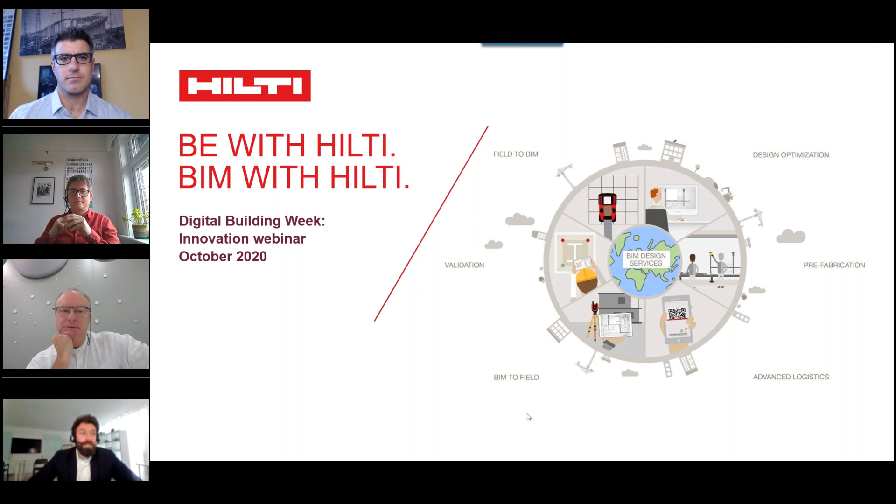I guess you all wonder what has Hilti to do with BIM and digital building innovation. Let me guide you through so you can see how you get there.

Hilti, 100% family-owned company. It's more than a brand, it's a legacy. It was founded in Liechtenstein by Martin and Eugen Hilti. And now it has more than 25,000 employees worldwide, and we are driving building construction innovation in more than 120 countries.

We offer more than tools and more than supplies. We are providing complete solutions. We concentrate mainly on anchoring, fire stop, and installation systems, combining measuring and detection tools with software and engineering services.

Because with our direct sales approach, we are taught every day by our customers about their pain points and what they really need on the job site. We have this end user knowledge that is enabling us to comprehend what can we bring upfront in the construction industry. So with our research development, as well as our specific competence centers, we are constantly bringing new innovative solutions on site.

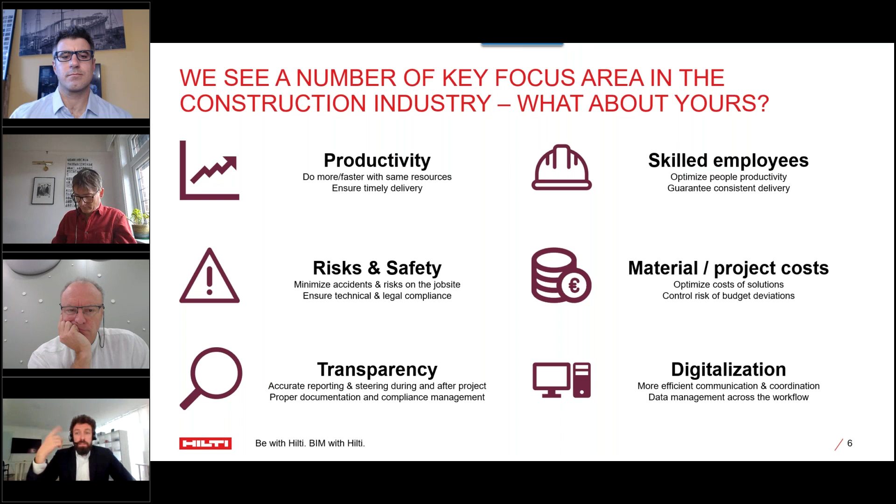We talk BIM, but not about a technology or a software, about BIM goals and use cases. We want to understand what is the reason behind a specific BIM project or our client.

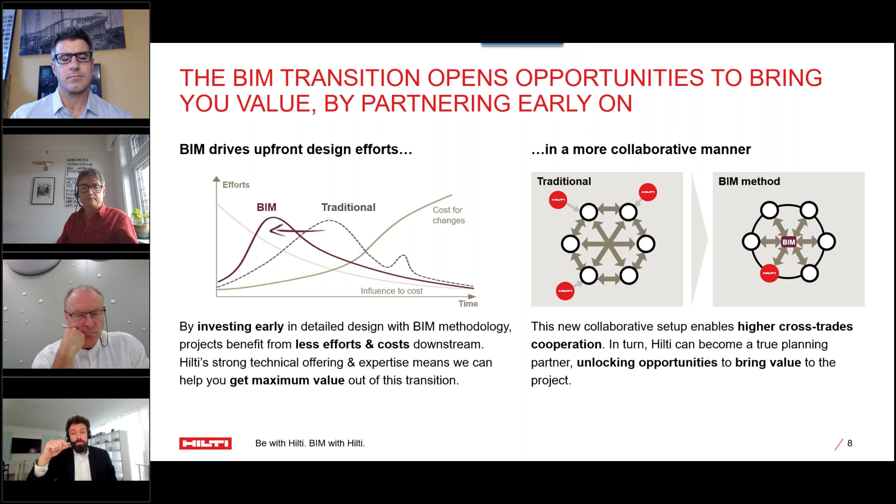And this, as you will see, is bringing loss of productivity, again, higher cost, again, risks, again, higher effort on the execution.

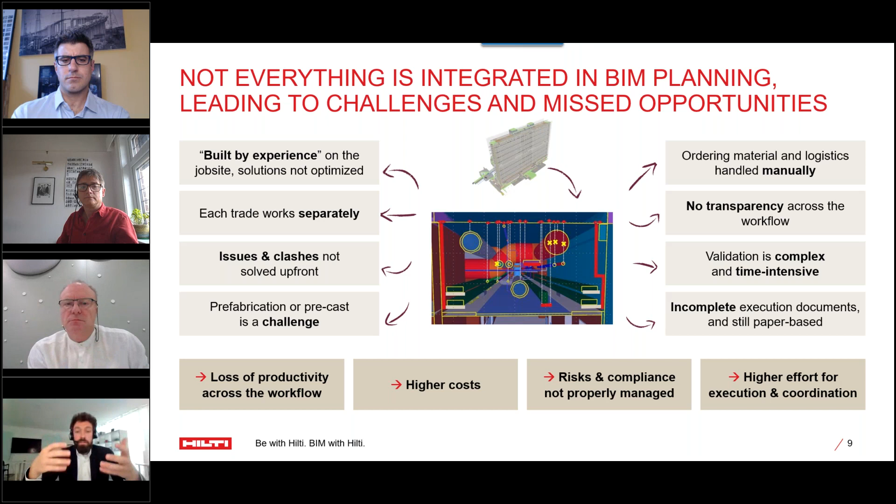All the support systems, they are not in a model. They are not coordinating. There will be clashes of coordination. There will be repetition. So here is where we come in.

We identified 6 BIM use cases where Hilti can bring value to your project: design optimization, prefabrication, advanced logistics, BIM to field, validation, and back field to BIM.

This brings value in cost and time savings at the overall scale of the project. It's also providing added value as transparency, productivity, and bringing back everything as an as-built model from the job site.

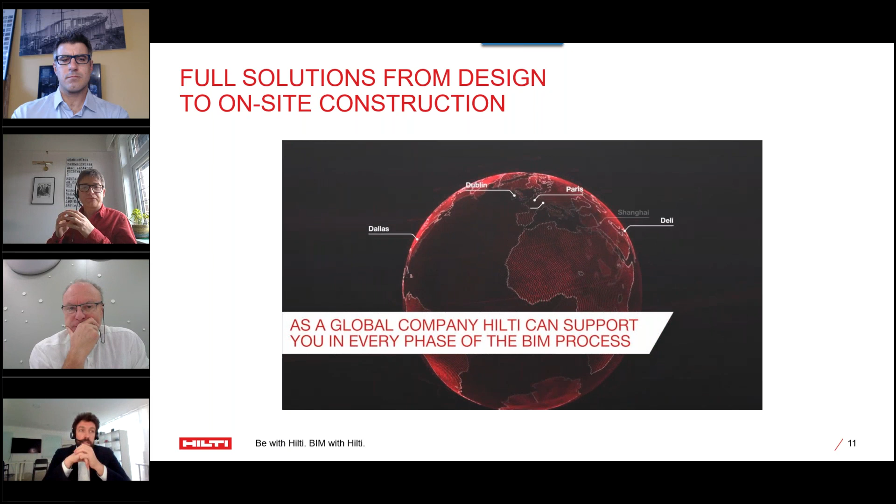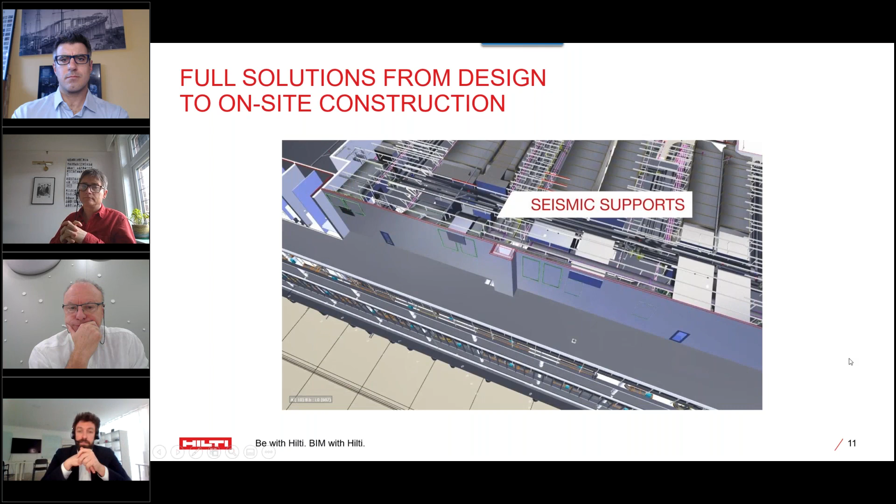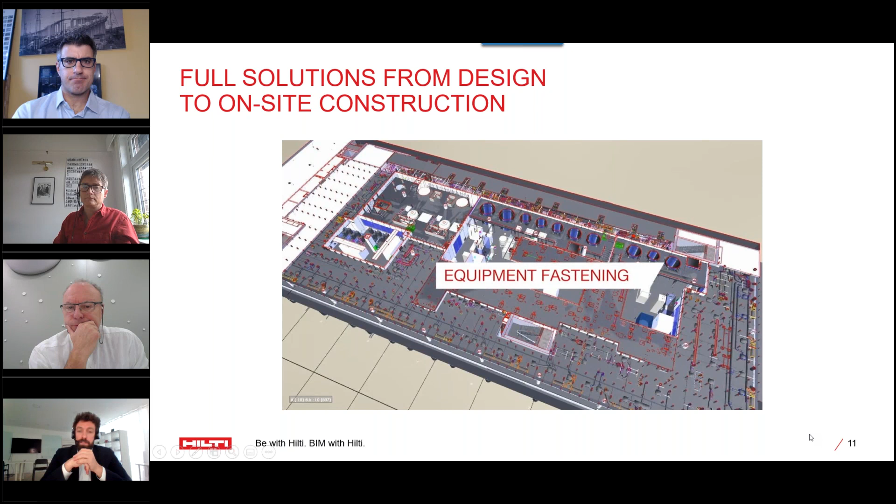Next, I will show you a video of the full solutions that we have for the construction industry, with some specific projects where digitalization started tens of years ago. You can see what we are able to provide in the pharmaceutical industry, laboratories, energy plants, etc. We cover a wide range of products and anchoring, and we go to a level that maybe you wouldn't expect.

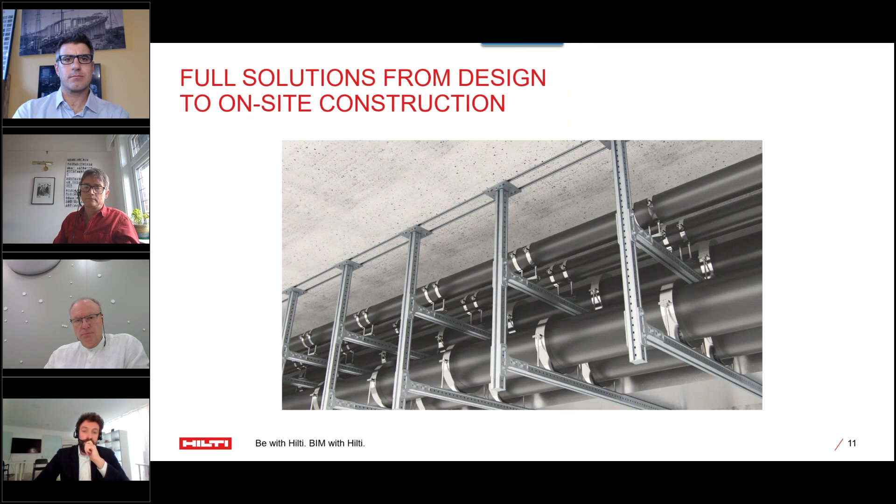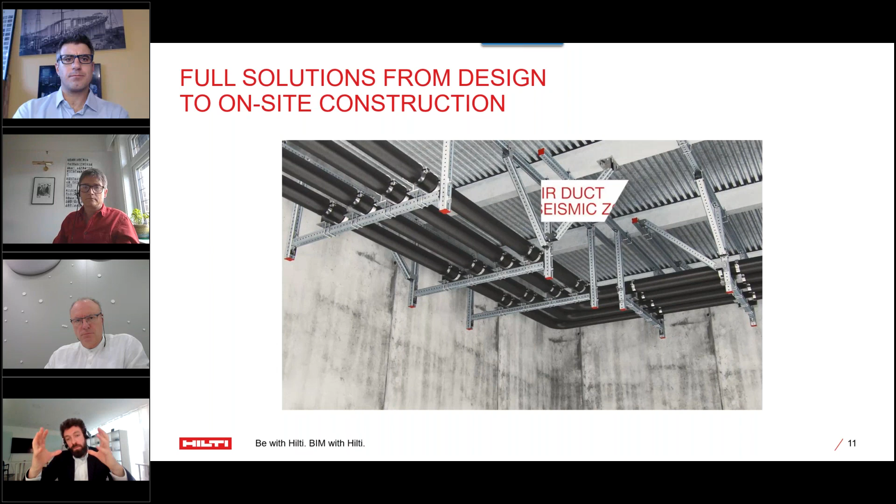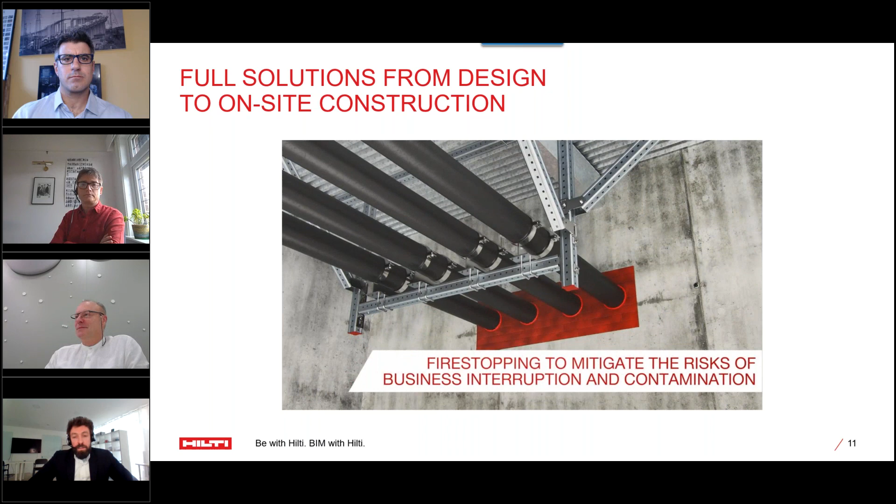This kind of modular support that you see in all these anchorage solutions is usually not designed or modeled. What Hilti does is design it through our services with specialized engineers, and this enables prefabrication. Everything is done off-site and delivered pre-assembled on-site.

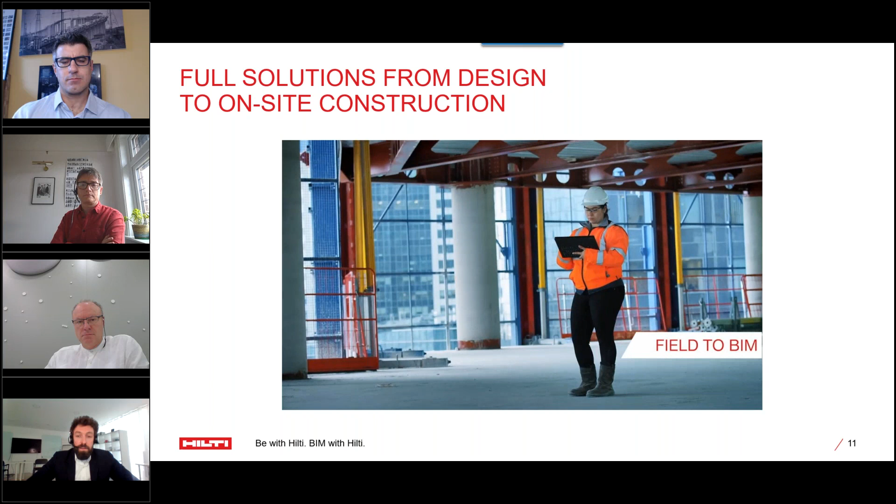Our software allows us to have the right calculation, and with the total station and robotic stations, we implement it on site. So that's why we are talking about a complete solution.

Now I have another video for the more commercial side of buildings. You'll see another range of products. Again, what we aim for is the multi-trade approach, where we can have, for example, a corridor of a hospital.

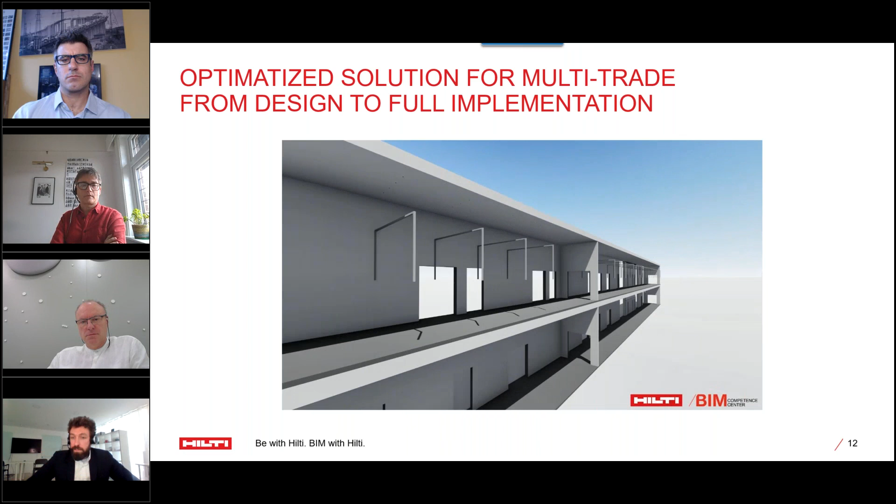We even think in 4D, considering the sequence of assembling different trades. So Hilti is collaborating across all the trades in the project as a partner.

You can see there the sequence of mounting, and we are delivering pieces by pieces at the right moment of the construction site. This is enabling advanced logistics.

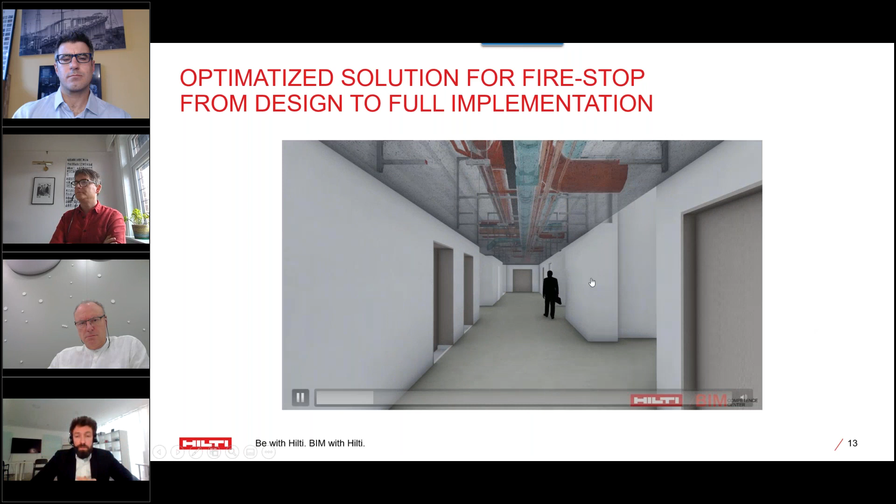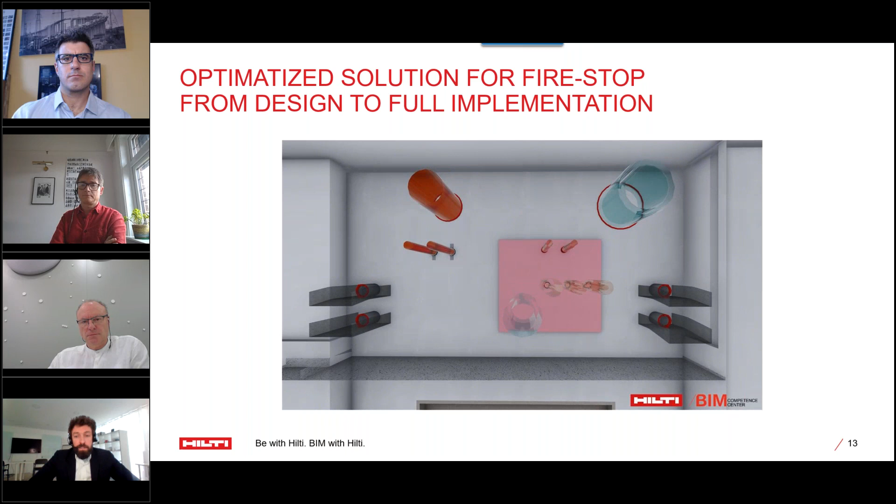And together with these installation systems, we are also adding the fire stop solutions that we have. This is also a rather forgotten element in construction, but it brings a lot of pain and delays in projects.

Those markers are sent to a total station, a laser measurement tool, which brings those points to be drilled on site. This adds a lot of productivity, saves time and cost, and also assures health and safety. The total number of people on site decreases significantly.

Hilti has more innovations coming. Please follow us next month. You will see a really nice tool that is also enabled by robotics and laser measurement.

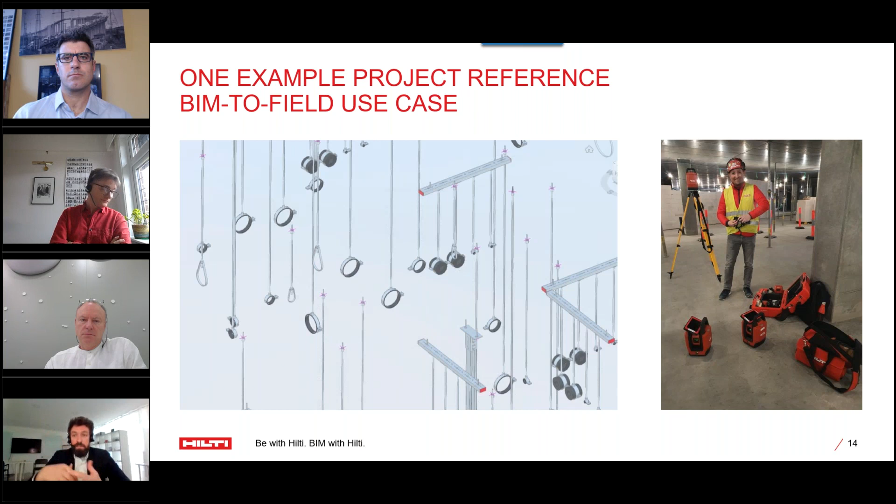This is the complete end-to-end solution, from digital to the job site, that we try to put together through our BIM services. Next slide—you can see, for example, that we are talking about real projects we are doing.

I just took a screenshot of one of the projects we are supporting in the BIM Competence Center. We have around 40 big projects in Europe, and worldwide we have several hundred projects. This slide shows only the Hilti elements that are modeled, and they are linked into the overall BIM project we are working on.

That was all on my side. Thank you, I think I'm in time, within the 8 minutes.

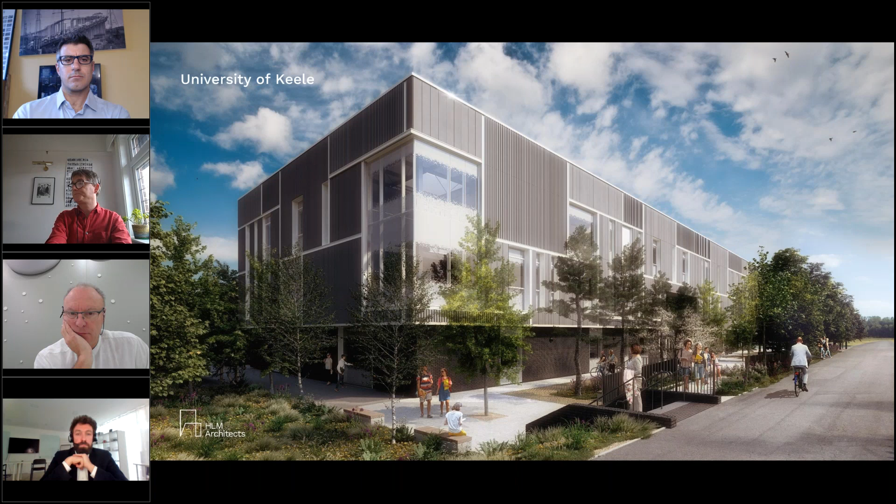So the Insight tool presents itself as an online survey which engages with building users around the themes of well-being and activity. Accessible by any user group our clients wish to identify, it explores personal preferences for the quality of the built environment under a number of physiological and psychological criteria.

The resultant data set, as you can see, is then used to help define the space standards and the environmental criteria of the brief. This process enables much wider engagement with building users than traditional methods would normally allow, and it's a more democratic and scientific method of capturing the brief.

The insights that can be gained help shape our approach to design, enabling us to develop a building brief that genuinely supports people's health and well-being.

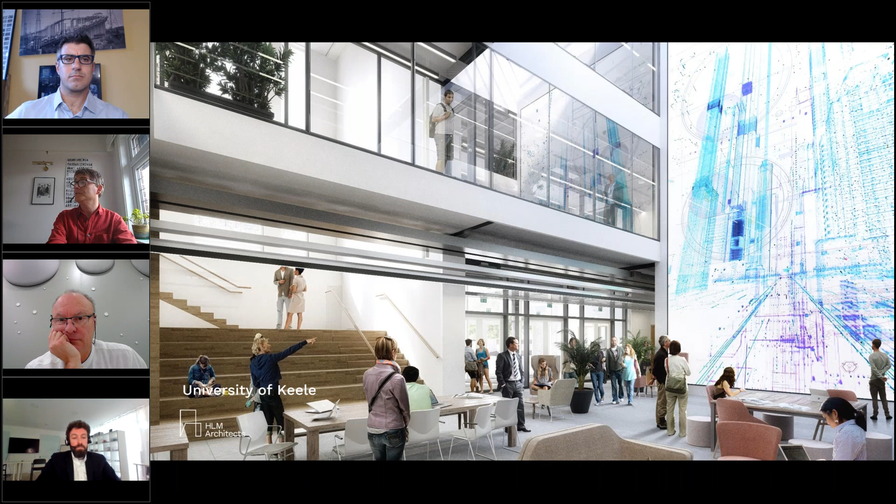For example, one of the key insights from Keele was a desire to create transparency and accessibility within the building that might better facilitate collaboration and innovation.

Another insight was that in this building for researchers who spent long periods of time on focused tasks, they wanted views to the outside and biophilic design features such as planting and natural materials to help them feel calm and relaxed. And so, armed with a data-driven brief, we could then develop an informed design response.

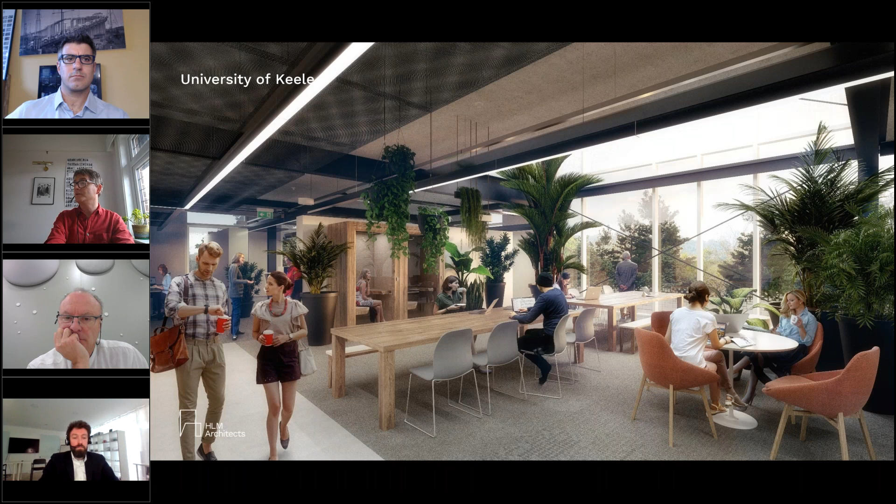So using our second tool, Health Check, we can quickly test emerging concept designs against the criteria of the brief to see how well they're performing.

Health Check is a web-based tool that draws on a database of climate weather files, CIBSE guidance, BREEAM criteria, and other best practice building guidance, which form benchmarks against which the emerging designs are assessed.

So designers input criteria that describe the concept design in terms of site-specific aspects such as orientation, external noise, heights, adjacencies, window areas, and so on. And these inputs automatically generate a data model of the building that is tested against the benchmark criteria.

The outputs indicate how the concept design is likely to perform against a range of environmental criteria, such as daylight, noise, heat, acoustics, and so on.

A traffic light system indicates which aspects are performing well or not, with suggestions for aspects of the design to reconsider in order to improve their performance.

And the key innovation here, for me at least, is that the tool relies on simple data inputs that are determinable by the designer at a very early stage. So there's no complex 3D modeling that might lead to abortive work. In this way, the direction of the design concept can be shaped much earlier in the design process.

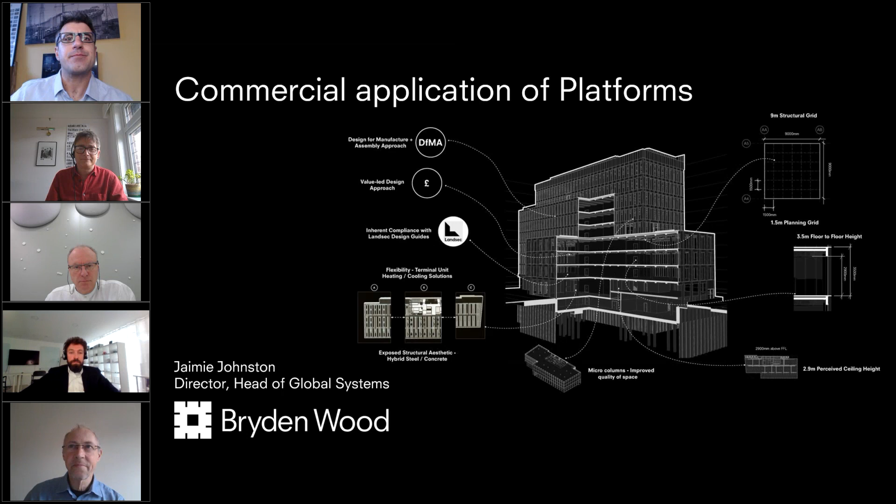I think actually it ties in very neatly with what Razvan was talking about right at the front end. So for those who aren't familiar, the idea of platforms was to take 25 years of various design for manufacturing assembly systems we've devised at Bryden Wood and turn it into, or crystallize it into a common kit of parts, perhaps. So maybe the closest parallel is IKEA.

So as you know, when you go to IKEA, whether you're building a wardrobe or a chest of drawers or a bookshelf, a lot of the components are the same, the kind of knockdown fittings, but also the process is the same. You always get a manual in the same format. You only ever need a screwdriver and Allen key.

So we're trying to identify, rather than focus on differences between sector types, look for commonalities. So for instance, healthcare wards and apartment buildings and education spaces all have about an 8-meter span, so you could start to commonize or get a common sort of kit of parts. This is the focus of the Construction Innovation Hub.

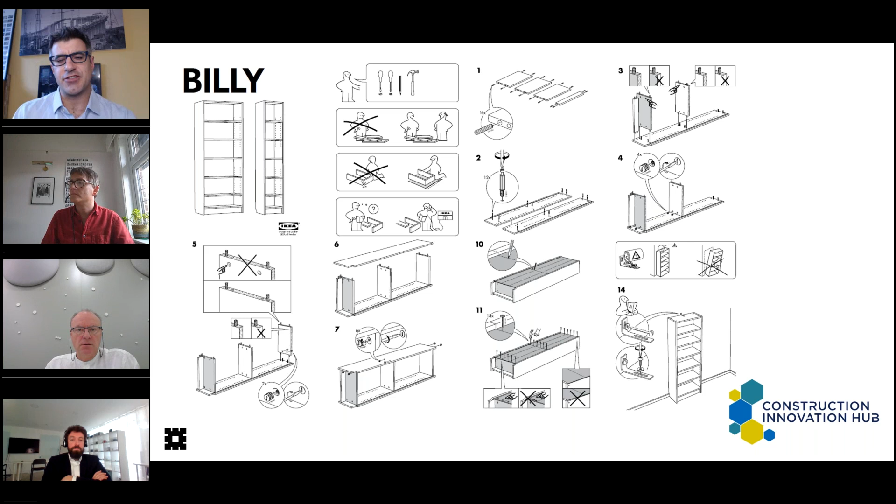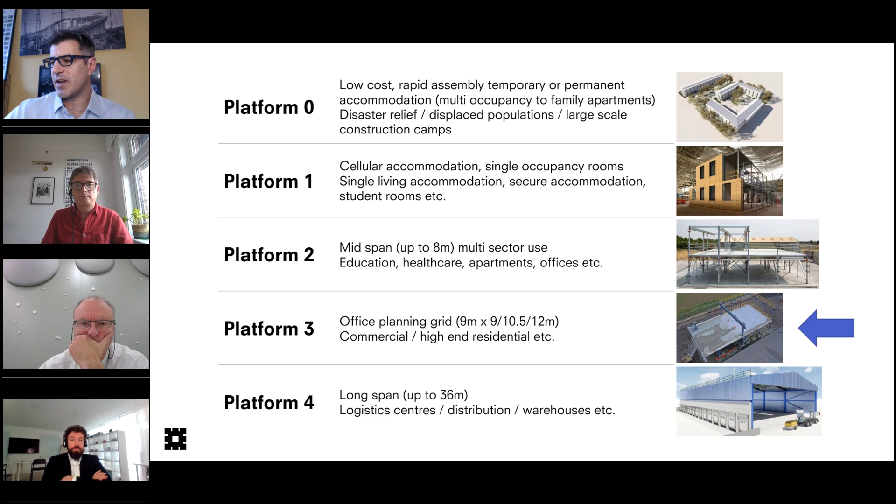I'm going to talk about one particular version of that, which is Platform 3 we're developing for Landsec at the moment.

Across the platforms, like the IKEA book, some components are the same, but actually a lot of what we're repeating is the ways of working: digital workflows, automatic generation of information, robotic welding, automation on site. Anytime we learn how to do one of those activities, we can instantly deploy it across all the platforms. So we're seeing rapid growth in maturity, and rather than learning it again on each sector, once we've nailed it once, we can deploy it cross-sector.

Once we have all of those, we can start to, like manufacturing does very well, once you get a component you want to repeat multiple times, it justifies a huge amount of effort in optimizing each component. If you're going to use a thing a million times, every gram you take out of it, every assembly process has a massive multiplier.

So we've started to think in terms of optimization of design. I won't go through all of these, but you'll see later when I talk about reduced build volume - rather than having separate zones for all mechanical and electrical systems, you can compress them into a product. Material optimization: once we've got the superstructure components, we can highly optimize those. Process automation: we're looking at how to get fewer people on site. So a lot of what Razvan talked about, that end-to-end approach, is exactly what we're seeing with this initiative.

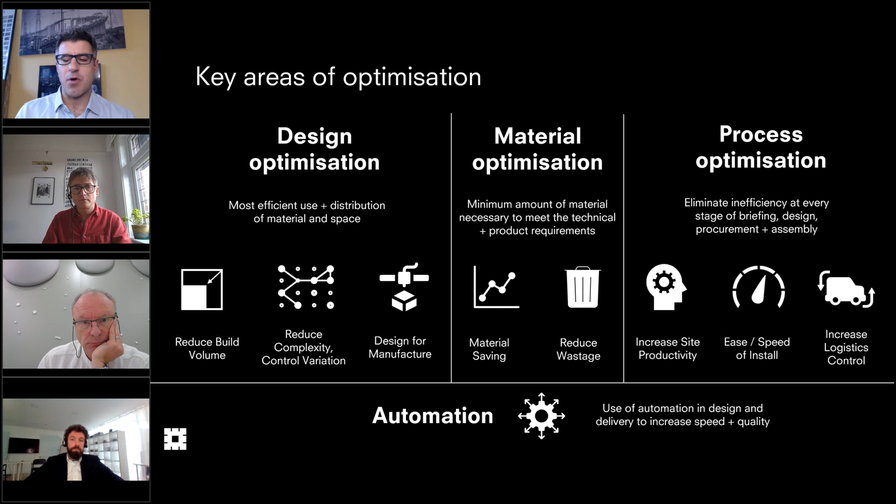So whilst we're developing these cross-government through the hub, Landsec, the developer, are the first people deploying this properly in the commercial space.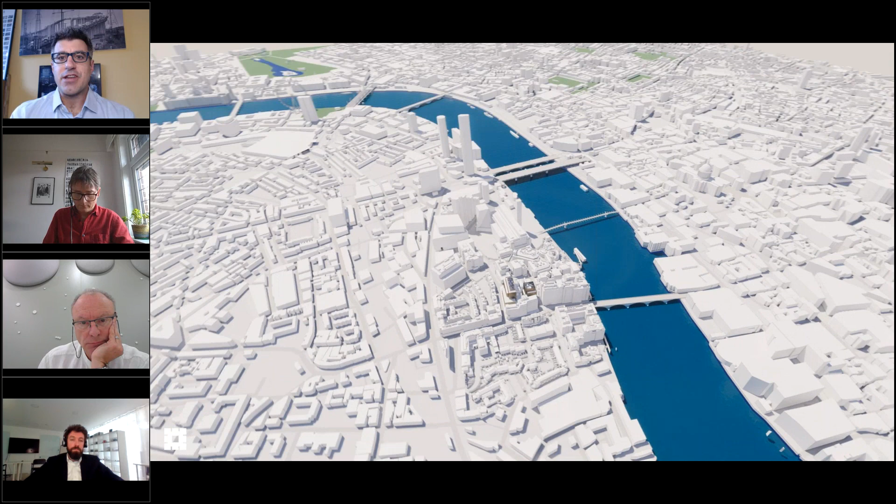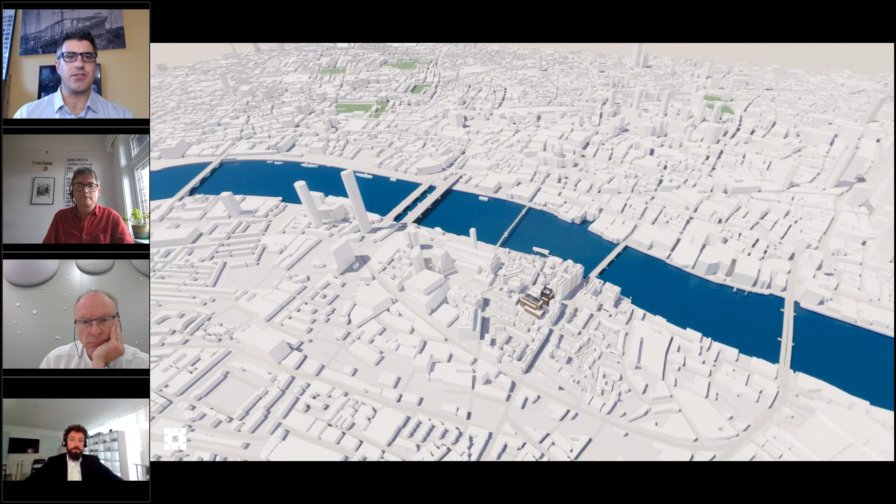Obviously Landsec are well known in this space for doing lots of things around Victoria, so a fantastic client for us because they've got a huge wealth of experience. They know exactly what the London office market's looking for, and we were given the opportunity to deploy some of the thinking we'd been developing at government public sector scale, specifically for commercial use.

So we've developed a kit of parts. Part of it is obviously the superstructure, which we describe as being like a carrier frame for the rest of the building. Whilst it's not the biggest part of the cost plan, if you nail the superstructure and get it millimeter perfect and it goes up very quickly, it's easier to imagine the MEP being a kit of parts that clips into place, the facade system being a kit of parts that clips into place.

So what we found for the optimization is by working very hard on the superstructure, you get this chain reaction of benefit - fewer components, more optimized components, better controlled logistics, fewer vehicle movements. Across this building, which is actually Landsec's first net zero building, you can see the impact of all of this: we've got a lot less superstructure, and because of the way we've organized the MEP, we've got a lot less basement, less foundation.

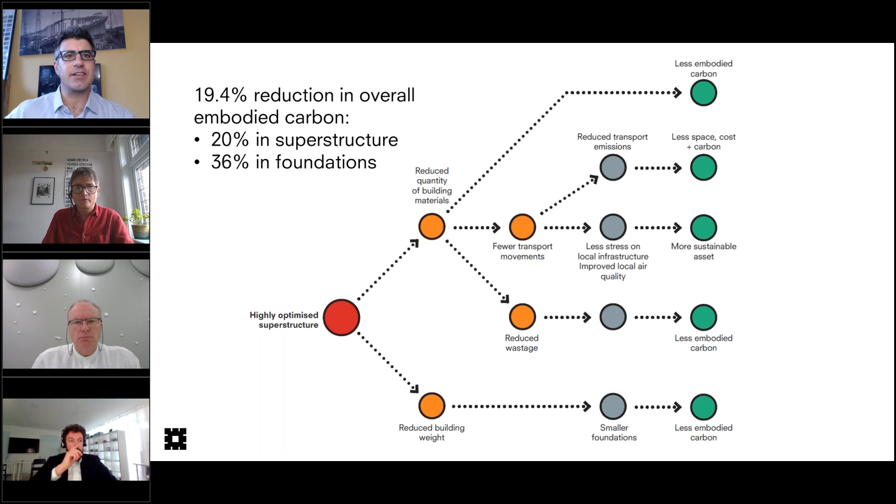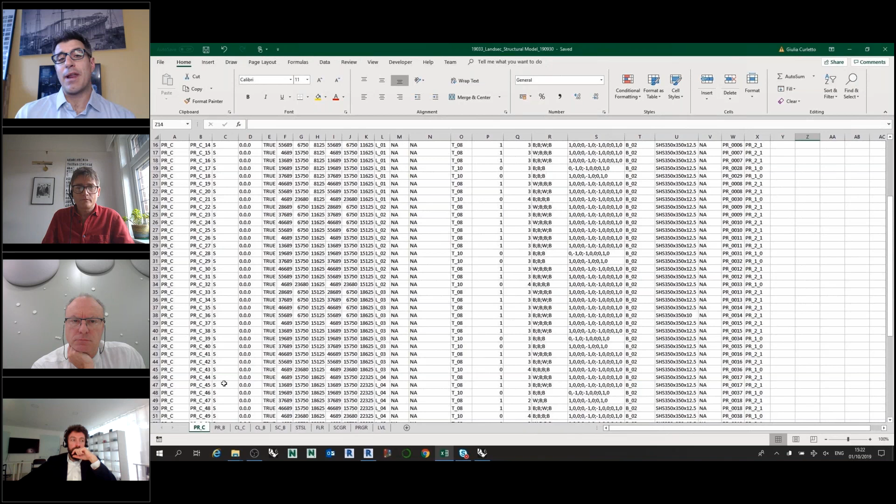So you're starting to get real tangible benefits in terms of not just cost, but also massively important carbon savings. Tying back to Razvan's point, having those digital components and using the same components means we can deploy automation in the design phase. Rather than create a model of a building, we create a data description of the building, and one output is the bill of materials, so we can instantly get cost and budget, etc.

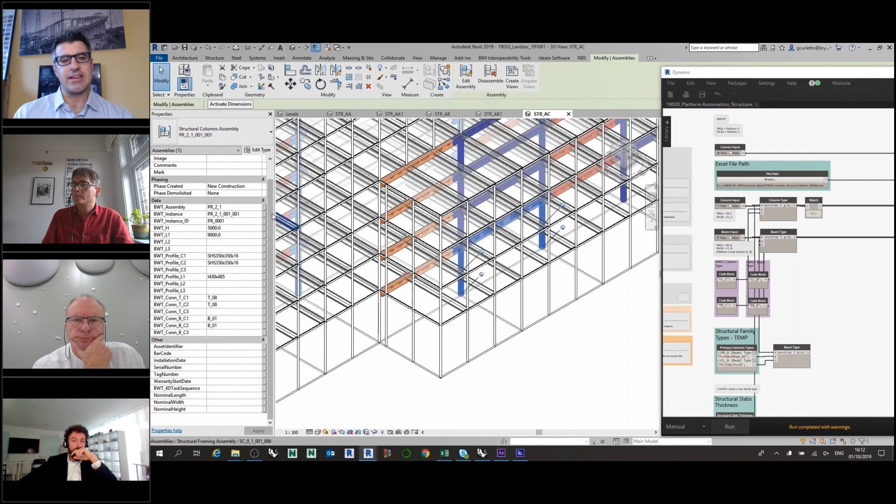The BIM model is then a view of that data set. So the BIM model you can see here is created automatically by taking that data set, getting the digital platform components, populating the model. Whereas BIM used to be the kind of central source of truth, now the data set is the single source of truth, and the BIM is one version of that. The speed it takes to generate a BIM model is incredibly quick, so changes get incorporated very quickly, and we automatically get all that richness of data off the back of it.

We've also then, because we're repeating components, been able to look at what level of automation is appropriate at the manufacturing stage. So we're using those components to digitally drive robotic welding of the brackets, for instance. We're investigating now how to use that same model to drive automatic welding of the components. You're starting to very closely link the physical and the digital, and that's going to become an increasing strand moving forward.

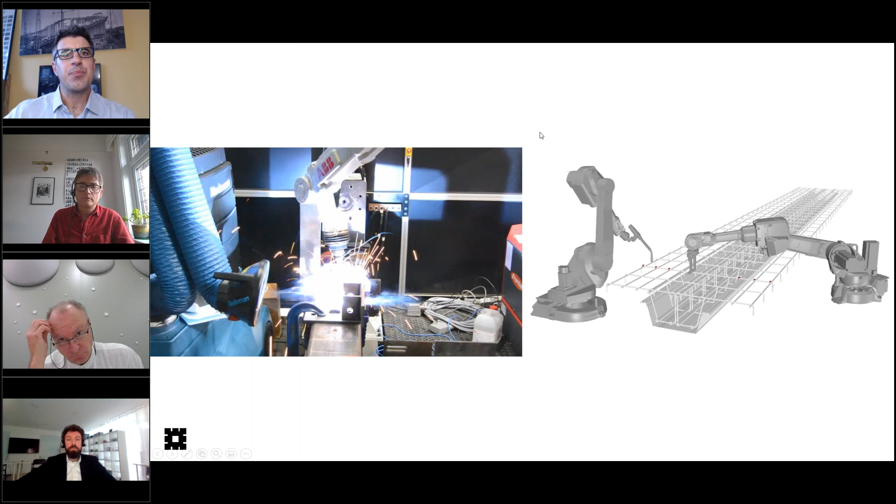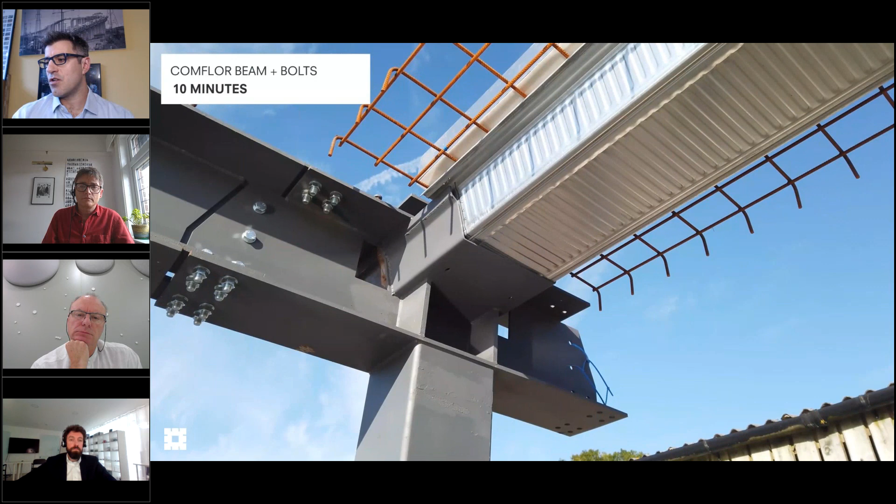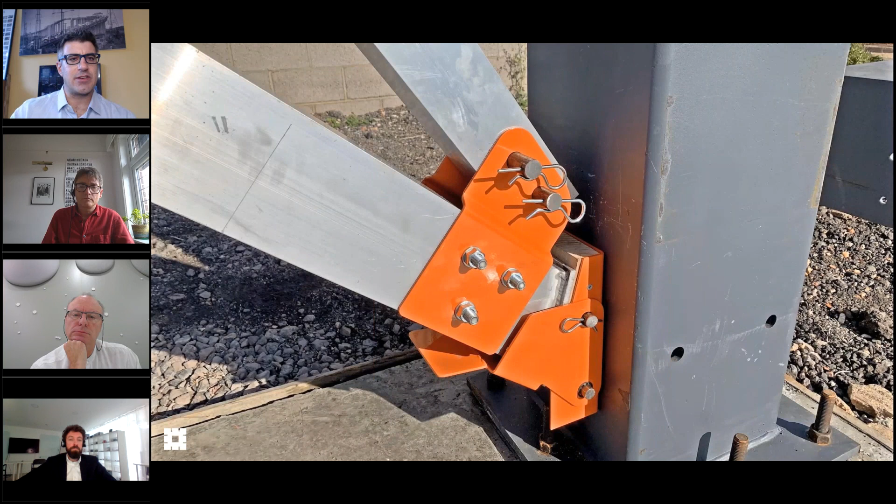We're also then on site using automation. So this was the prototype, we've got a prototyping center, to investigate what level of automation is appropriate on site. So again, like you build your IKEA wardrobe in your bedroom, how few people do we need, how few specific tasks, how much repetition can we get. This was looking at how to build a slab from the slab below, so no one's ever working at height, no one ever needs to stand on that slab.

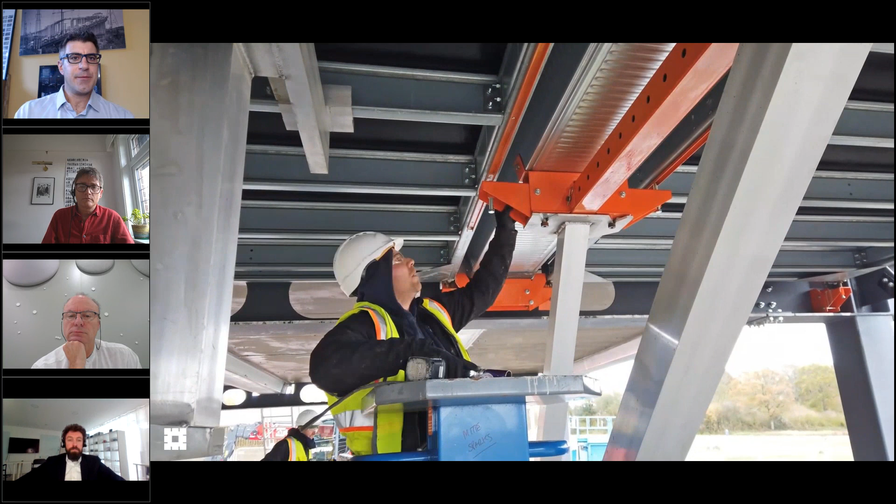You can see with a handful of people, a little bit of automation that we've taken out of distribution centers, a little bit of pumping, robotic leveling, we can deploy the superstructure with half the number of people very quickly to a much higher quality. And actually, we've got all of the MEP fixings already cast into that slab, so as soon as you strike the shuttering, you can then clip the MEP in.

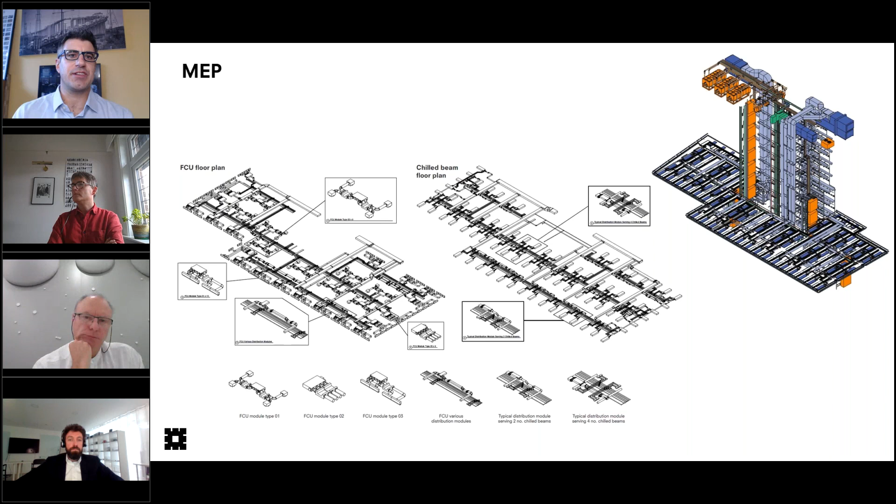Within the MEP, we've got two versions of it, so we've got the same kit of parts, or repeatable kits of parts, which allows Landsec to decide quite late in the day which type of cooling strategy to deploy, for instance, and then we just pick the components to suit. Obviously, that then clips straight into the superstructure.

Again, we've been testing this on the prototyping center, so the speed of installation is incredibly quick, productivity is incredibly high. We were doing it for productivity gains, but you can imagine it really helps with social distancing on site, for instance, to have very few people on site.

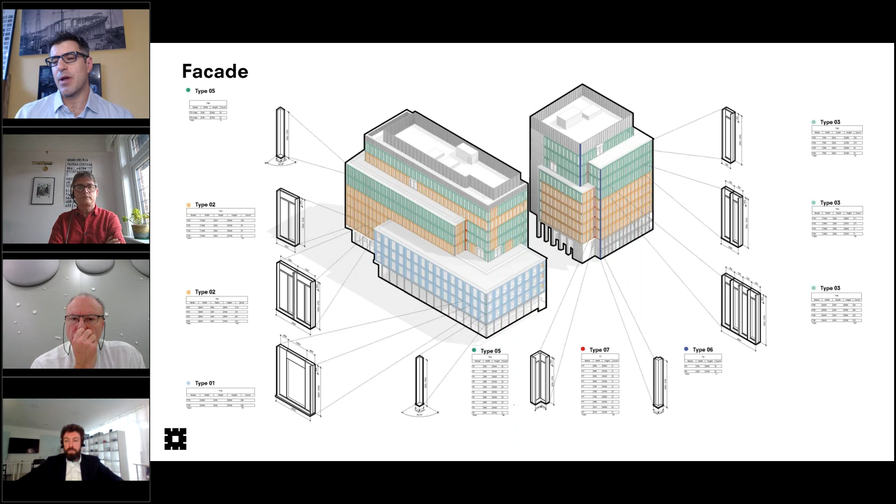And then into the facade, we've applied the same thinking to rationalize the facades. What we found actually is because we've then compressed the MEP into a very tight zone, it allows us to have more glazing, which meant less reliance on electrical lighting, which meant lower electrical load. So again, we start to get these chain reactions of benefit, where these things start to create additional benefits to get better use of building volume, better use of carbon, better use of materials, etc.

So these are the statistics that we've currently got on this project. Bear in mind, this is Landsec's first project like this, but it's quicker, much less carbon, quicker, more net lettable area, and all those benefits we expect only to improve over time. And all of the learning from this instantly gets ported across via my role as design lead into the hub, and again back into that kind of ecosystem of components. So every time we do one of these projects, the benefit gets captured, the learning gets captured, puts back into the kit of parts, then gets propagated across sectors.

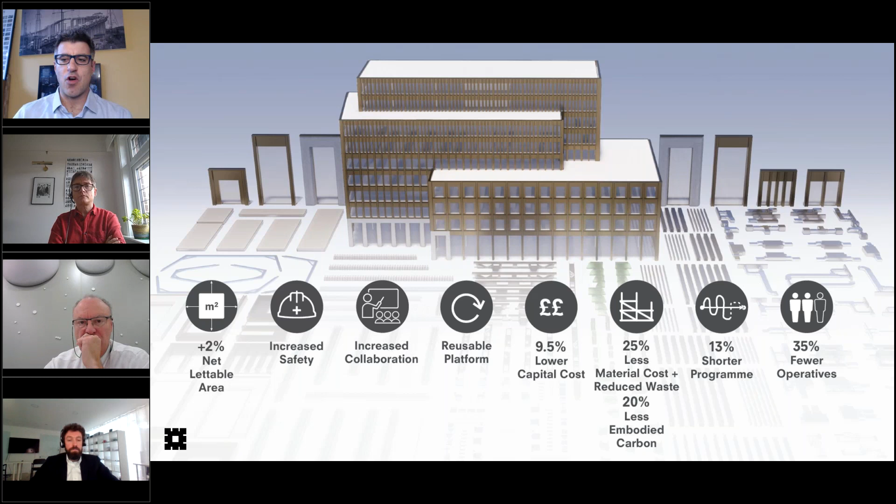So we think there's quite an interesting, or very exciting, opportunity for us to move a number of sectors forward very quickly, and to get that kind of continual improvement, which is common in manufacturing, but less so in construction. And I will leave it there.

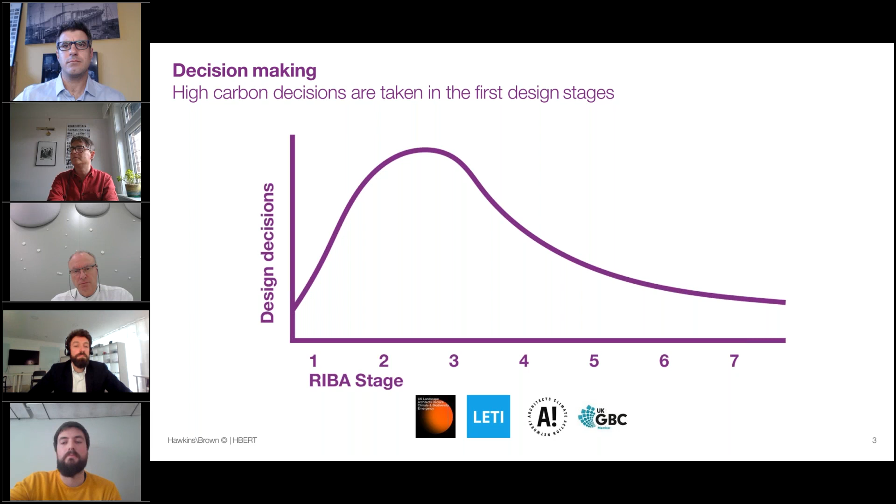I don't think I need to validate the environmental reasons behind developing such a tool, but purely from an architectural standpoint, if the industry's got any chance of meeting many of the environmental goals we're trying to meet, we have to do something now, otherwise we're never going to get there. And we have found that much of the environmental analysis currently being done takes place at the end of a design stage, after many of the high carbon decisions have been made, so it leaves little room to make meaningful change. And so we wanted to develop a tool specifically targeted at the concept design stage.

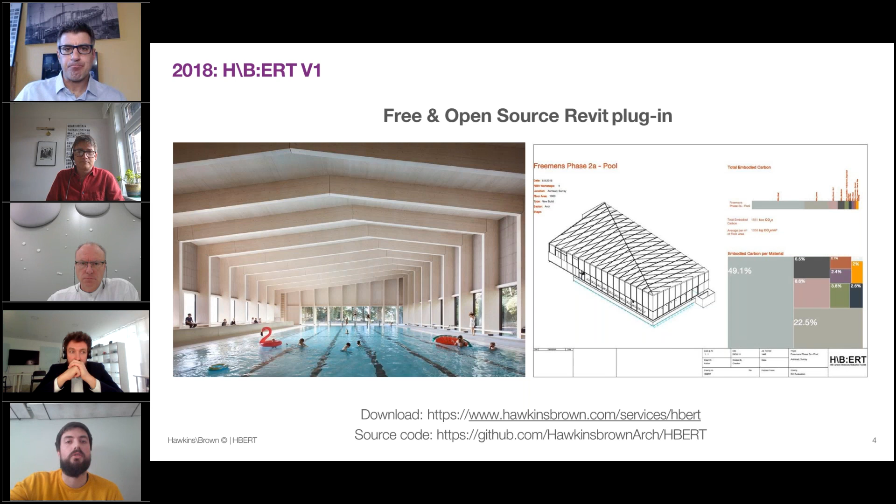So in 2018, we released HBERT, which is a free and open source Revit add-in, and this measures the embodied carbon directly from your Revit models. You can download this today from our website or contribute to the source code through GitHub. But we thought we could push this a lot further and add more functionality and get over a few of the limitations from the first version. So since then, we've been working on version 2, which is our Revit to Web Whole Life Carbon Toolkit.

I think it's worth clarifying that HBERT version 1, although it contained metrics for all of the key whole life carbon stages as defined by RICS, it didn't cater for operational energy use in module B6, so we did not consider it a full whole life carbon tool. We've now incorporated this in version 2, so it is a true cradle to grave toolkit.

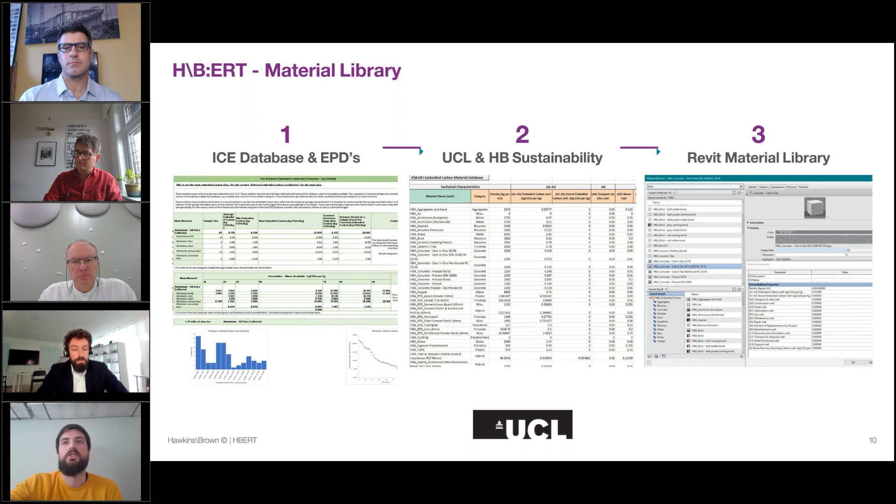And it's this data from the materials and our collaboration with UCL that is the backbone of HBERT. UCL and our sustainability team have worked to get quite complex information from the ICE carbon database and product EPDs, and basically boil down that information into a spreadsheet format, which then can be embedded into all our Revit materials and web library.

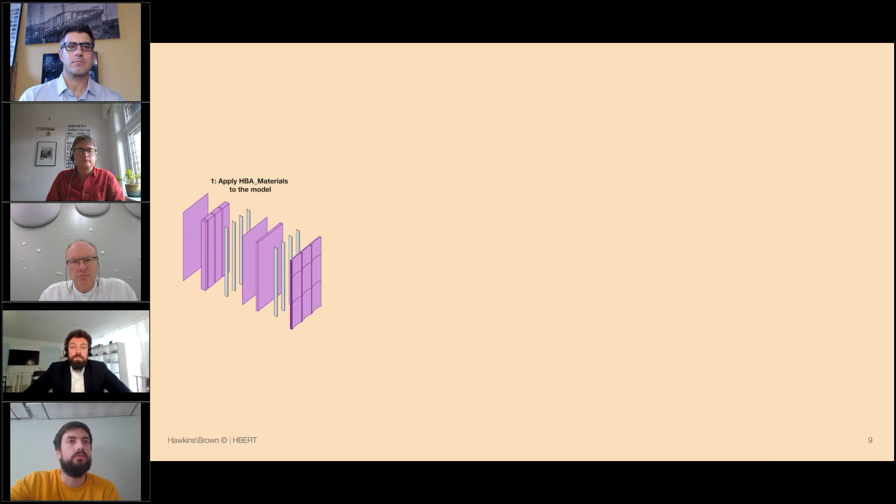So here's just a high-level flow chart of how HBERT works. First, all our design teams are able to apply materials and our standard families directly in their Revit models. We're then capturing this material and volume data, as well as every element's RICS category. We're pushing all of this into a HBERT splash screen, where we can also feed in data from the rest of the design team and run really quick analysis directly in Revit. We're then able to push this to our database for more detailed comparison and visualization on the web.

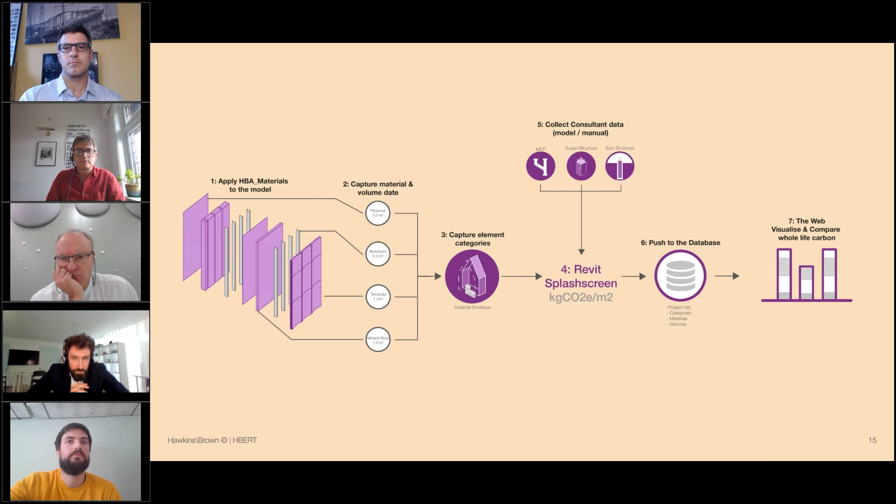I don't really have the time to go into the Revit side of HBERT in this 8 minutes, but just to say that we've put a lot of work into basically rebuilding our templates from the ground up, and we've built a number of apps that run and manage HBERT, as well as the HBERT splash screen, so users can run and see analysis immediately in the Revit model. And hopefully you can all see a video now.

But once users have done the splash screen analysis, they're able to quickly upload to the web. And then everyone has access to our main project library. So here you can access your project. All the analysis that you've uploaded is shown.

On the left-hand side, you have all your core whole life carbon metrics, the bar chart, which shows how far off the scheme is from being net zero. Every single element in the scheme is broken down into its RICS category with its benchmarking shown. And this benchmarking is also shown at the top, so a comparison of the target benchmarks for RICS category against each of the true categories for this upload.

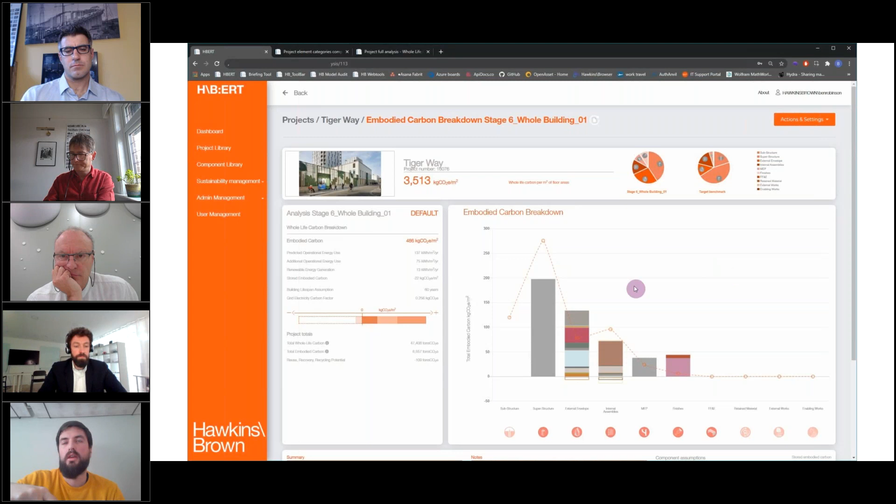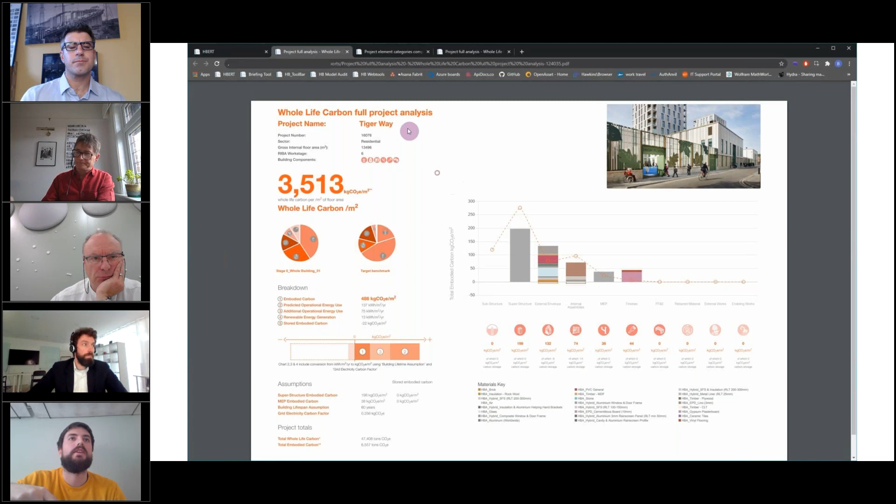Another core new feature now is the ability to download these data sheets of any analysis. This gives all the key information on the scheme on one page that you can really quickly embed into presentations or reviews. And you can continue to drill further into this analysis.

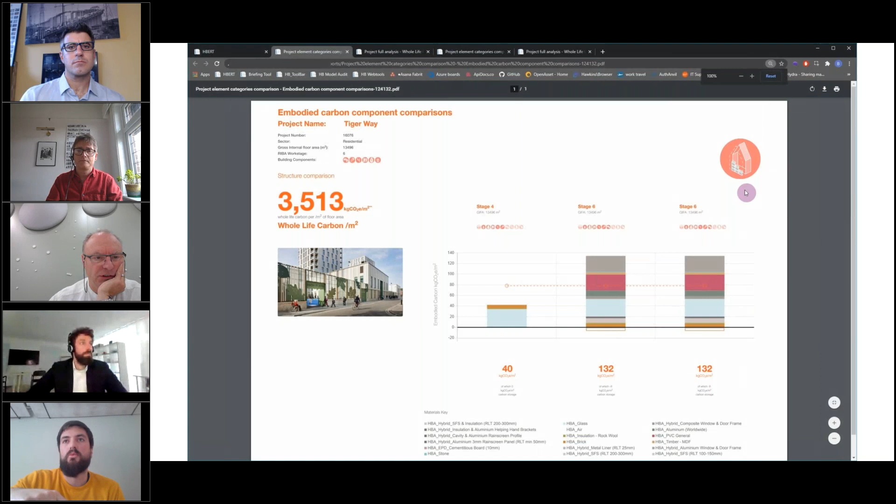So here I'm isolating the facade, and now you can really quickly see the different impacts different designs and materials make, or how the project has developed as it's gone through the work stages. And again, this can be used for presentations with the data sheet.

And as soon as a project is uploaded to HBERT, it's also included into our whole life carbon leaderboard, and we have 2020 and 2030 targets on, and you just immediately get a sense of just how much work is needed as an industry to get anywhere near the 2030 benchmarks.

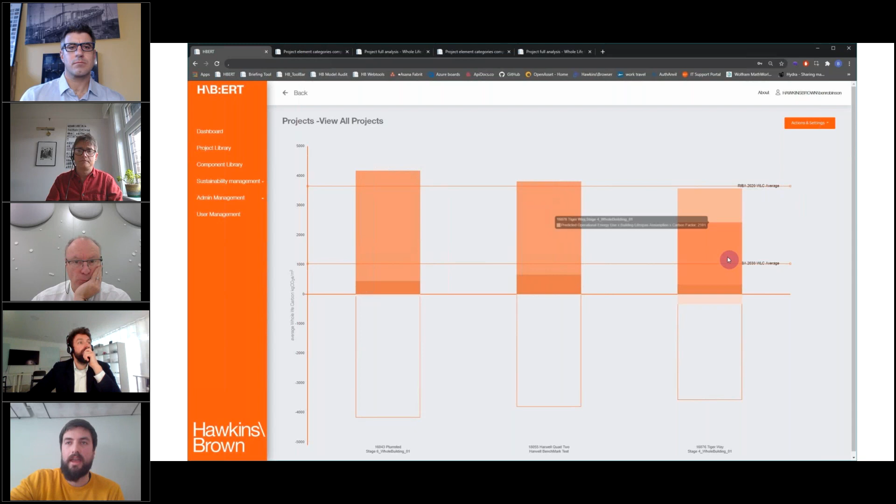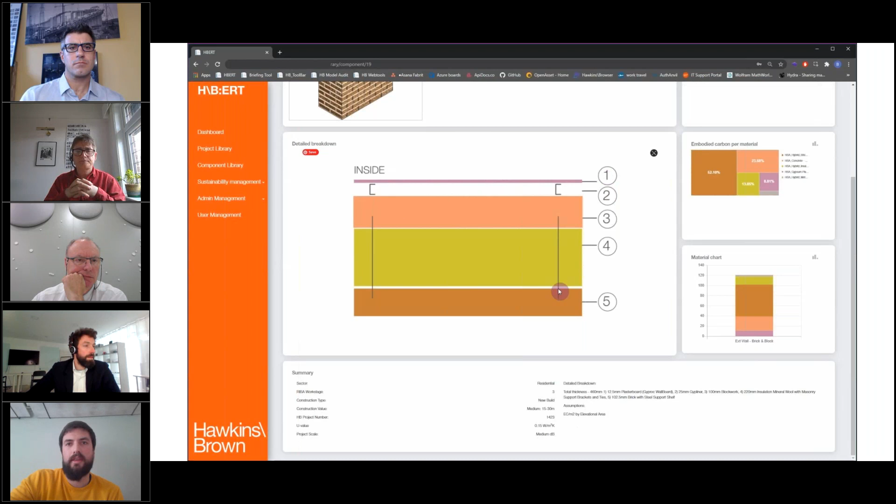In addition to the project analysis, the great part of this now is this component library where our sustainability team have been working really hard to develop these data sheets for a huge number of typical build-ups and components, and it breaks down a typical build-up of a wall in this case, all its key metrics and its embodied carbon. And again, these can be downloaded and used for reviews.

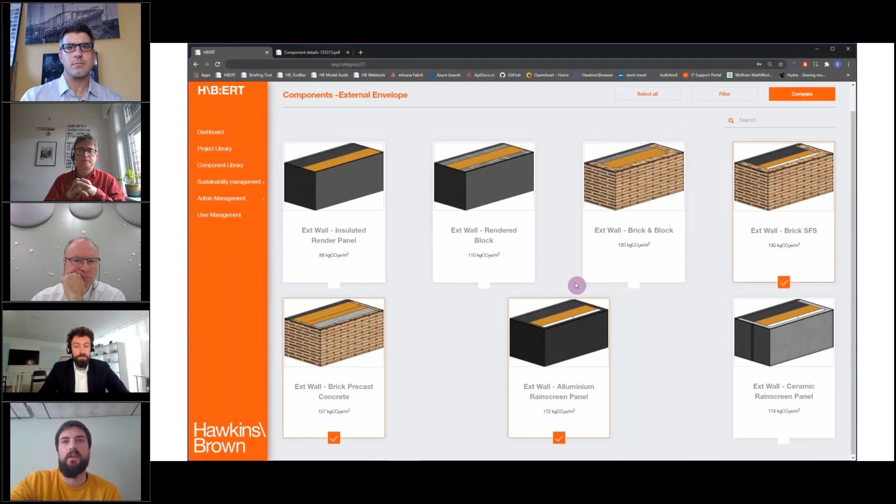But I think the best feature of this bit is that - and this is early days, so we haven't got a huge number of components up yet - design teams are able to run immediate comparisons and compare different facade options in this case and see what its whole life impact would be on the scheme. And then again, download these and put into presentation format.

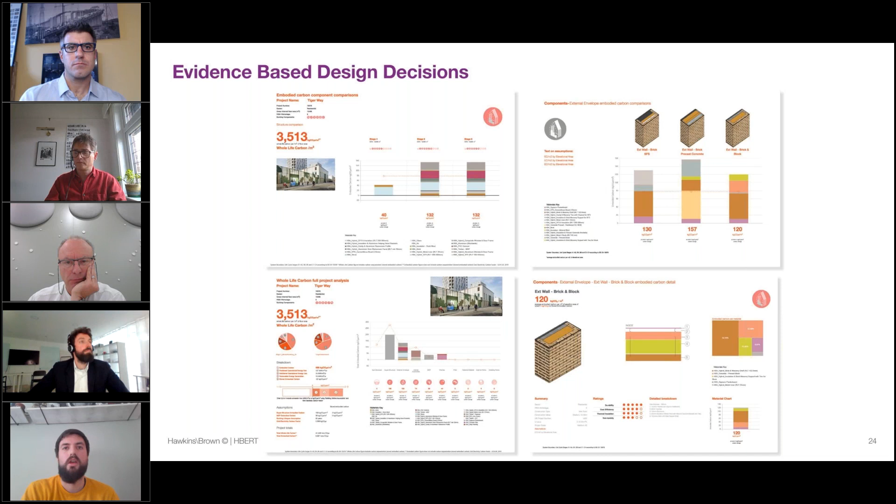And I think for me, that's the best feature of HBERT. There's been a whole lot of work gone into the new front end and back end, but the ability to have immediate visualizations of what is quite complex information available on any one of our Revit projects is great.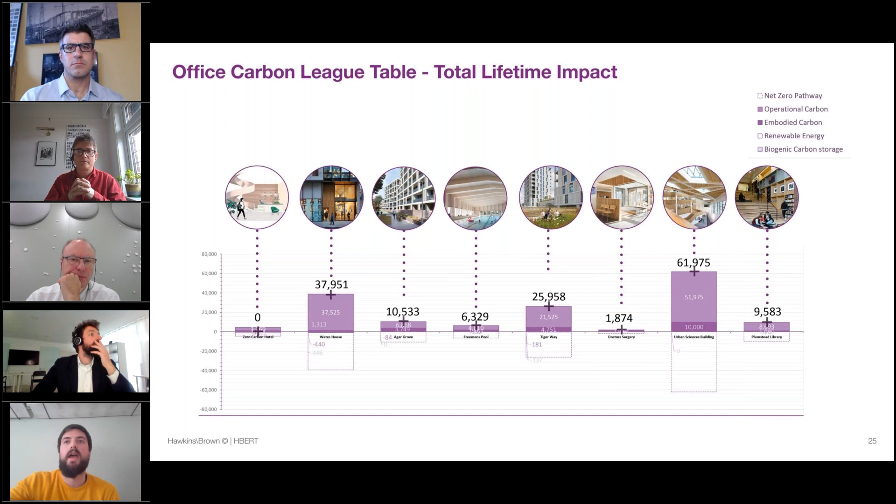And alongside that, we're now able to get our past projects - we're starting to run them through HBERT - and we're putting together an office leaderboard of the total carbon impact of all our designs. I think not only does it allow us to learn from past projects, see what we've done well and right, but it also holds us to account and holds teams to account of the impacts, and hopefully we all learn and get towards meeting our goals.

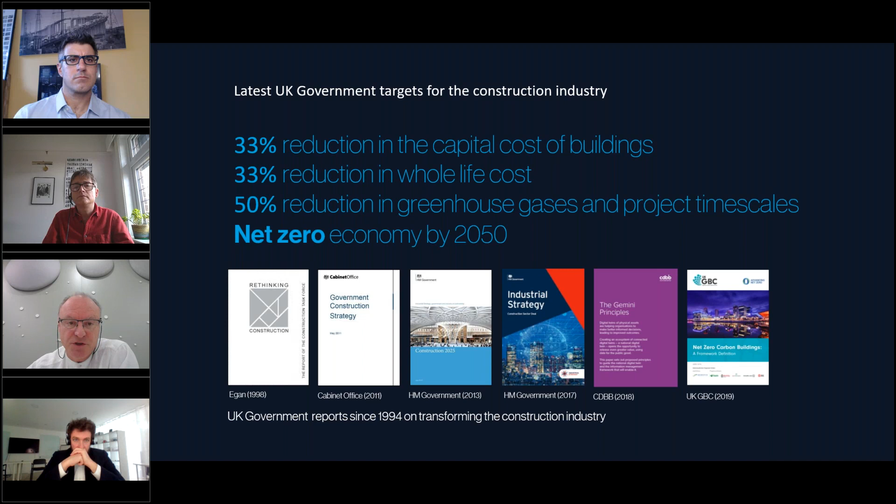The built environment, as we all know, contributes around 40% of global carbon emissions and is the largest single sector identified by the UN. Our industry could have a huge impact on the reduction of global carbon emissions.

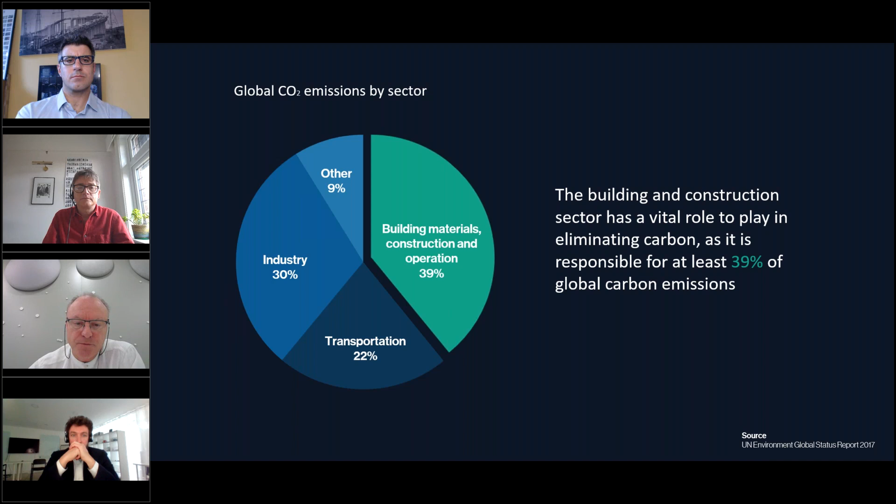Now, we all know the average carbon footprint of a UK citizen is around 10 tonnes per year. And if you divide the total annual carbon emissions from the UK construction industry by the number of registered UK architects, just as an example, you come up with this figure of 1,365 tonnes. By anybody's standards, architects have a huge gift and enormous social responsibility to drive down the carbon footprint of their buildings in construction and in use.

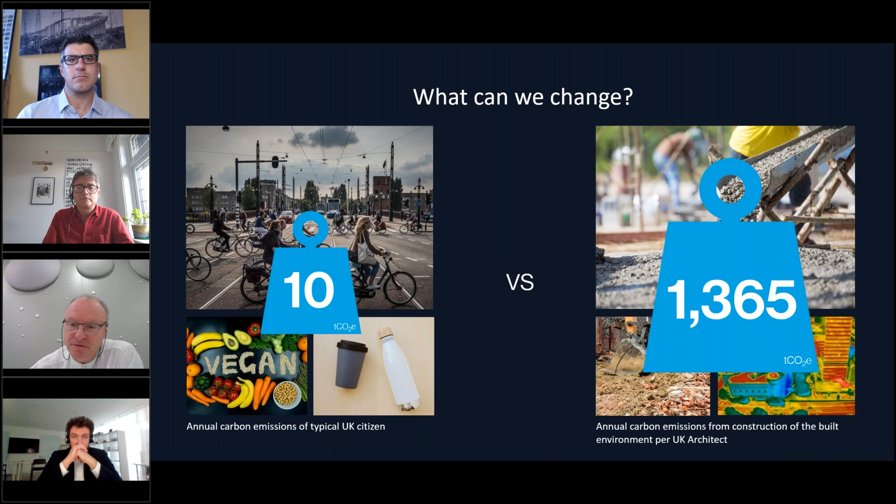Even with your typical UK citizen making sacrifices such as cutting out meat, cycling everywhere and not using air travel, you can see they're probably still at best halving their carbon footprint, saving about 5 tonnes of carbon a year. Compare that with an architect's ability to make reductions. As an industry, we're all focused on capital cost efficiency and to a certain degree embodied carbon.

What this slide shows is that the capital cost of a building represents only 20% of the total cost of designing and owning a building over its first 30 years. So we should all be really focused on the post-completion occupation of the building rather than just the costs of building it in the first place.

This slide is an HM Treasury graph which shows that our opportunity to reduce embodied carbon is far greater in the early stages of a project. Our research estimates that 80% of the potential for reducing whole life costs and carbon exists in the concept stage, the first 20% of the RIBA work stages. Some previous speakers have said similar things.

So our aim is to integrate whole life costs and carbon considerations from the earliest stages of concept design and throughout design development. Firstly, we've had to standardize the information delivery process and develop a protocol for better information management using BIM. Secondly, we automated repetitive tasks and processes for integrating whole life cost and carbon through the development of a prototype software application to prove our concept.

So how have we defined 7D? The true potential of BIM is in the data attached or linked to the 3D model, and we've carried out one of the first major research projects in the world looking into the integration of BIM with whole life costs and whole life carbon. So our dream from the beginning has been to create a valuable decision support tool to help designers make better choices.

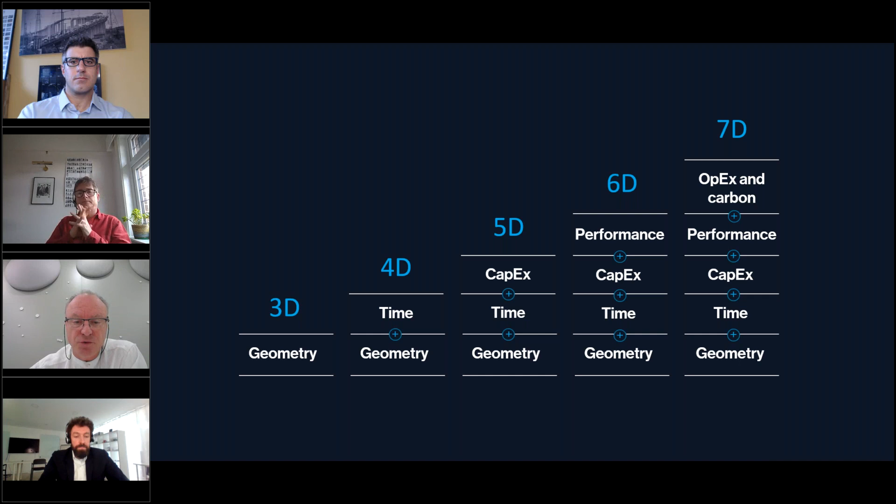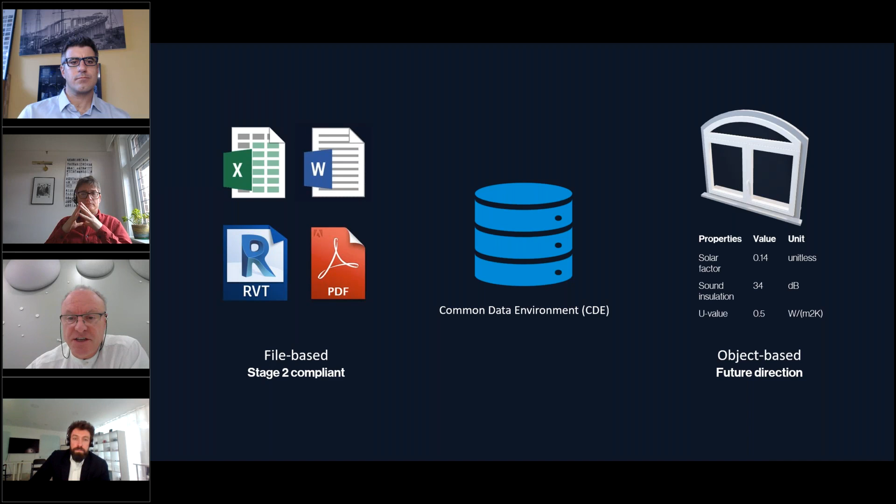As you will know, the provision and use of a file-based CDE is an essential part of stage 2 BIM compliance, but whole life cost estimation requires more sophisticated data structures in the form of object-based information storage.

We've developed a design decision support tool which allows us to make informed decisions at key milestones during the design development process and to close the feedback loop.

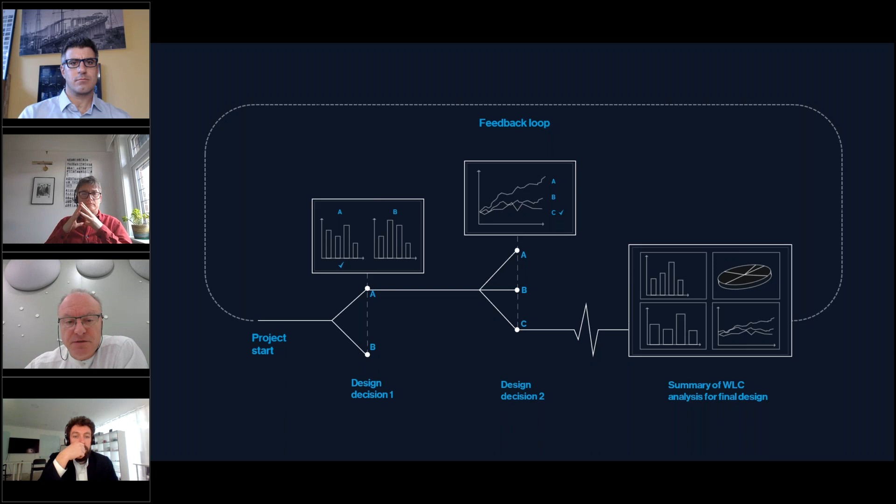At the core is a web app. This is where the actual calculations happen and project information is stored. We decided against a desktop app for better accessibility and quicker deployment across large project teams.

There are links to existing whole life cost and whole life carbon databases, and currently we support 3 different sources, although in the long term we hope to build live data that is fed back through standardized processes. So plugins allow us to pull model information into the web app and also present the results back to the designer, supporting them during the decision-making process.

This is a very quick snapshot of how the software works. The 7D tool allows us to specify desired unit mix for different types of tenure and different methods of calculation, either by unit or habitable rooms.

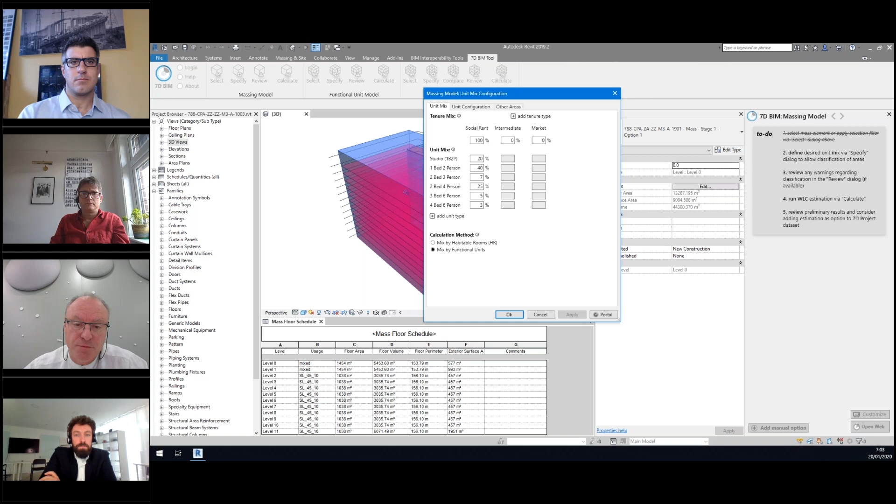With massing and unit mix now set, we're given an estimate of the count of residential units and auxiliary areas that would fit into this concept model. So we can now proceed to the actual cost and carbon estimation via a single click.

We're now looking at a model which the design team would typically develop to RIBA stages 3 or 4, with building components represented by specific model elements. However, we don't always want to remodel elements to test alternatives. We can see that the cost for aluminium windows is calculated by the tool at around £3.3 million, and the carbon impact of 868 tonnes, both over 50 years.

The 7D tool can identify elements by the classification, map them with entries from the cost database and carbon database, and undertake estimations of whole life cost and carbon.

For this example, we want to compare the current aluminium windows against timber windows only. With only one window selected, we can activate the compare function, and the tool will find all other elements with identical classification. On the right-hand side, we can see the current type of element and the last calculated whole life cost. Beneath, we're given the selection of similar elements from the linked cost and carbon database.

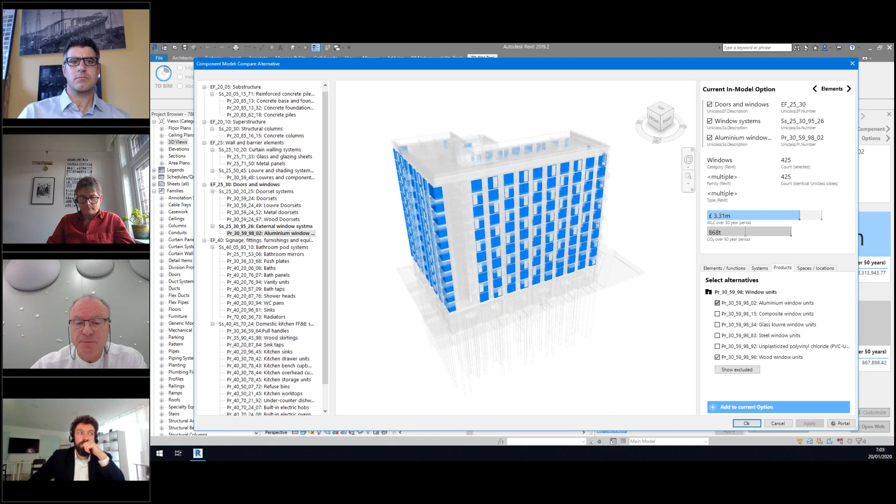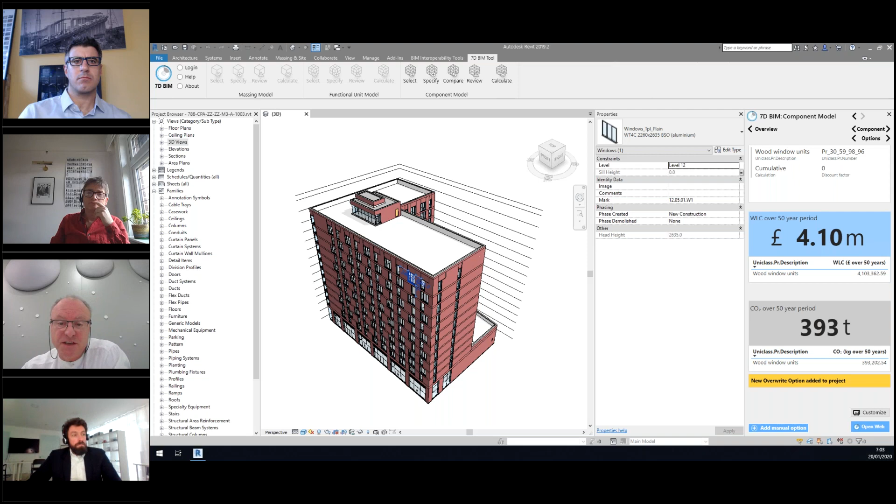Without changing the elements of the actual model, we're given the what-if feedback or overwrite option. In this example, we can see that 425 windows, if made from timber, would cost us £4.1 million and emit an equivalent of 393 tonnes of CO2. This shows that by spending £790,000 more over 50 years, it appears to save 475 tonnes of carbon.

That equates to a reduction of 55% of the carbon from the windows alone. This is a 3D model viewer for clients and building operators to help them engage with the process. It uses the actual CDE-hosted model if a CDE is being used, removing the need for separate uploads and ensuring the entire project team is using the current model. Apologies if the animation is lagging a little, because I'm sharing my screen.

Also within the web app would be dashboards providing in-depth analytics, helping the user understand the relationship between components and design options. The first example showed the impact of different window materials, and the cost and carbon breakdown at different stages in the service life of the product over 50 years.

Here we can see the impact of the choice of soft flooring, for example in a build-to-rent apartment building, and the choices of flooring can have on maintenance cost over a 50-year period. Obviously, soft flooring is the single largest maintenance cost by a long way, and would justify closer consideration of this material.

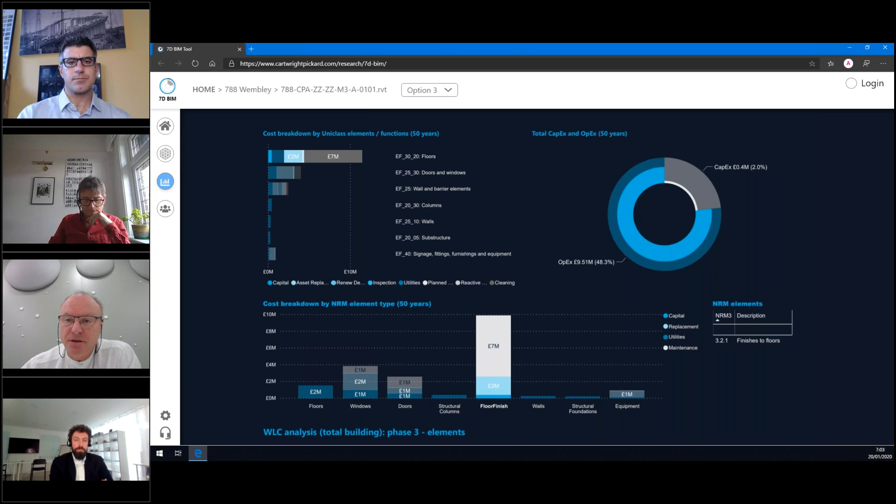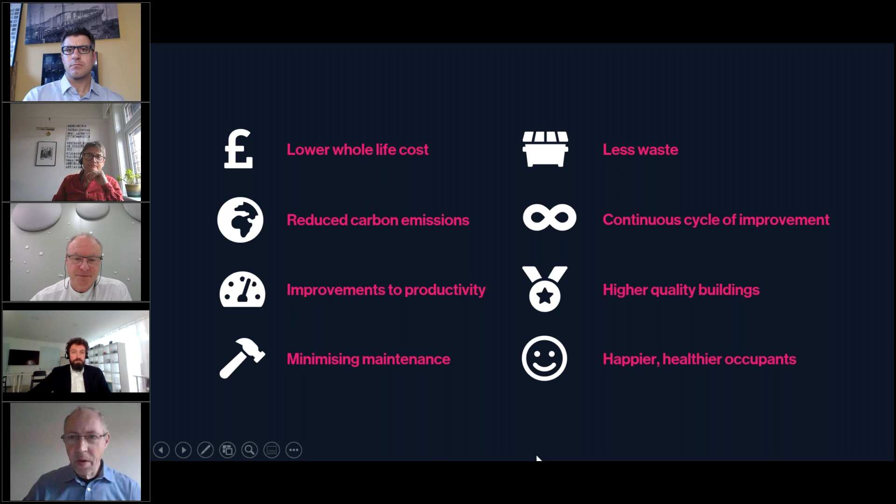Thanks very much, James. It's an amazingly ambitious project. As you said in the presentation, data is the driver for tools such as this. You must need a huge amount of data about products, carbon, how much embodied carbon, also data in terms of how long a product would last, how much maintenance it would need over its life, and what the carbon impact of that would be. This is a huge job. Where do you get the data from? And do you have the data, or is it a long job that's going to take years to build out all the information?

There are whole life cost and whole life carbon databases in existence, and we have access to three of them. One of our project partners, the insurance company BLP, gave us access to parts of its database, which was very helpful, and we also have access to two other databases. So you're absolutely right, the software will only be as good as the data it has access to, but we've developed the software so that over time each user will benefit from the data built up by all the projects. The data will be anonymized, and there'll be a central source of whole life cost and whole life carbon data that will benefit every user of the software over time, but that will take time to build up.

I see. And the second question, I presume this is a work in progress - is this going to be something that's commercially available at some point in the future, and if so, when would that be? Yes, it definitely is. We've basically completed this 2.5-year KTP funded research project, backed by the industry partners I've shown. We are hoping to launch probably another 2-year period, which will take the prototype software we've developed and turn it into a marketable piece of software that will be commercially available. So the answer is, watch this space. In about 2.5 years, that's what we're hoping to do, and it will be available for designers across the world - architects, engineers, clients. It will be available to everyone working in our industry.